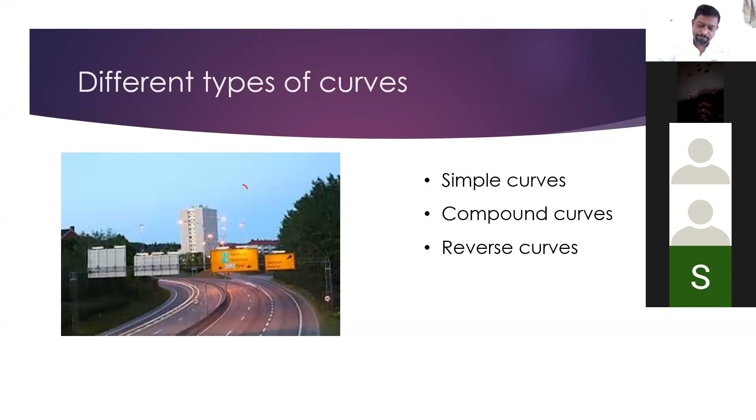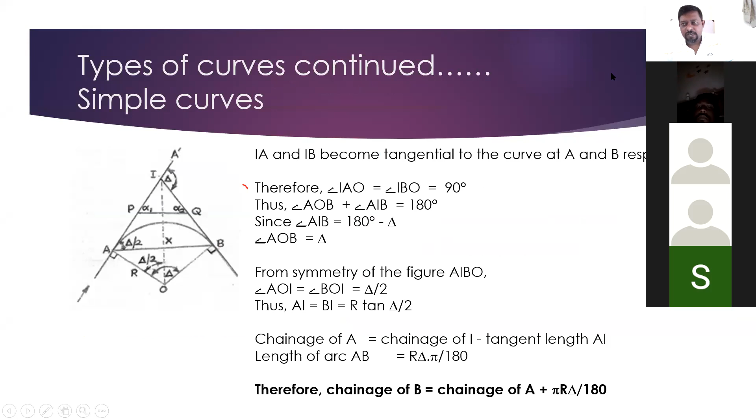Regarding simple curves, they are circular curves which are connecting two directions or two tangents together. Now, if you see this tangent and this tangent, they are connected using a circular curve. There are properties of tangents, and all those properties are inherited by these curves.

For example, if you want to calculate the length of this AI, where I is the intersectional point, it normally comes up as R tan(delta/2). This angle delta is the angle induced at the center of the curve by this arc. So if you want to calculate the length of this AB, measuring this angle in radians, with your maths knowledge you know it is R theta. This represents the angle induced at the center, so if you multiply this by the angle in radians, you will get the arc length.

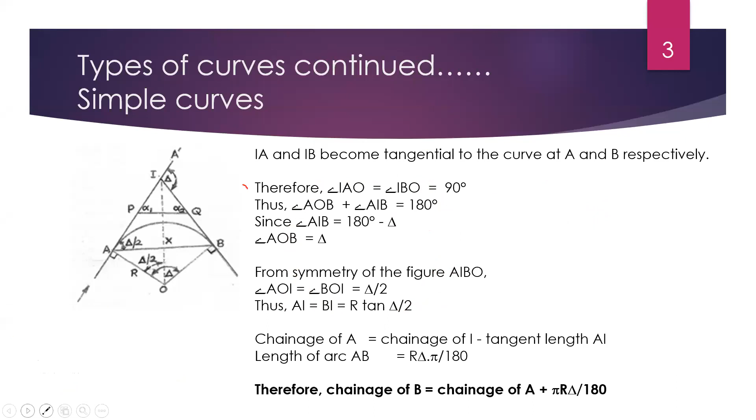Here we are describing compound curves. In compound curves, there are more than one or two curves combined together in order to create a transitional curve or a direction changing curve.

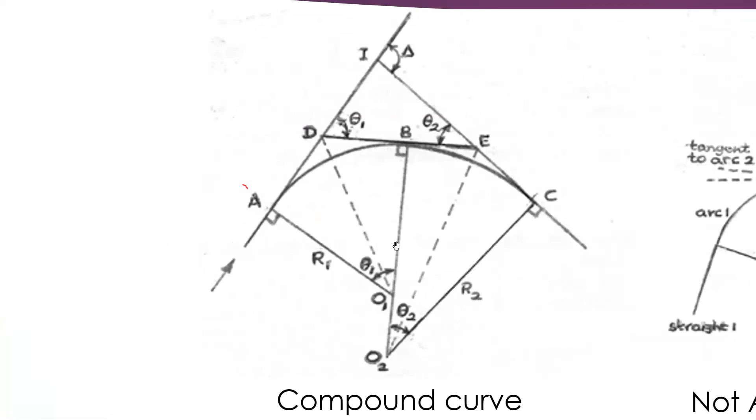Here you can see that there is a radius R1 and there is another radius called R2. These are arcs of two different circles combined together at point B, as you can see here.

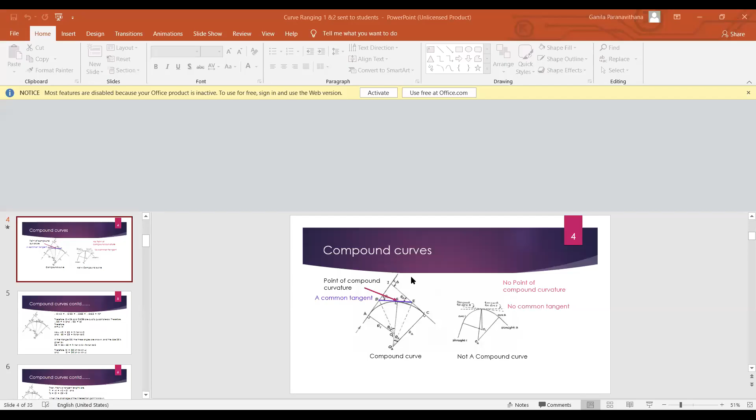Sorry, there is a problem running animations in this, so I am trying to figure out how I can fix it.

Now, in this slide, you can see this point is called the point of compound curvature. This point is the common point, and there is a common tangent which can be drawn to this point for both curves.

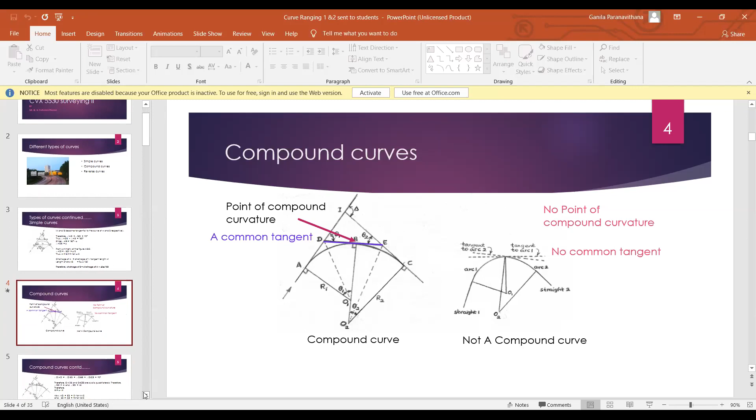Now the next slide discusses the geometry of these compound curves. You can see that this arc AB can be written as an equation of R1 and theta, and this arc BC also can be written as an equation of R2.

So finally, you need to find the chainage of point C with respect to point A. In order to find the chainage of point C with respect to point A, first you need to find the chainage of point A. In order to find the chainage of A, first you need to find this particular point of intersection. Now from this point of intersection, if you deduct IA, you will get the chainage at point A.

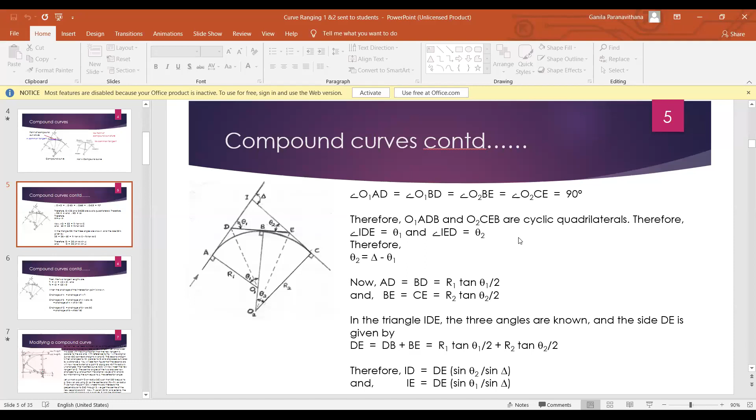If you look at this triangle ADO1, AD can be obtained by R1 tan(theta1/2). Why? These two angles here are similar angles, so this length AD can be calculated using R1 into tan(theta1/2), because this angle here and this angle here are similar. So AD can be found using R1 tan theta1 divided by 2.

Similarly, DB also can be found, because DB is equal to AD according to the geometry. Then on the other triangle, you can find BE and CE as R2 tan(theta2/2). Now, if you know this DE length, which equals DB plus BE, you can see it here.

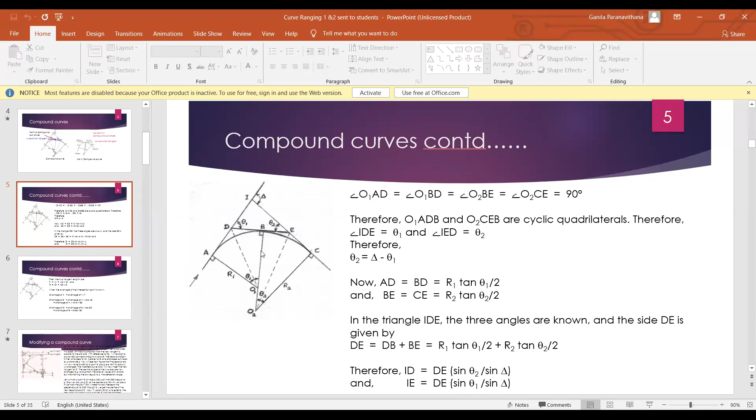Now you know AD and ID, so you can simply find AI here. If you found AI, you can extend your incoming chainage to point I and find the chainage at intersection, chainage at I. You can reduce it by the IA length and you will find chainage A. Now you can find the arc lengths AB and BC, add them up, and you will end up with the chainage at point C.

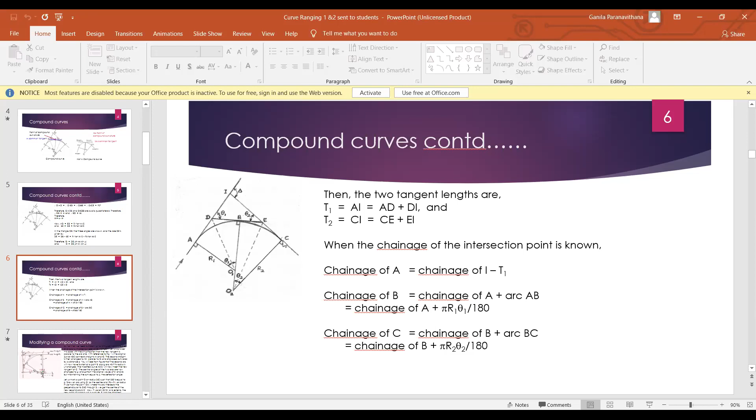Now, this section I have extracted from your book. Now, this section is a little complicated.

I wonder whether I will be able to run the animation through Zoom. There is a problem of running animation through Zoom. I'll give you 1 or 2 minutes to read this. Can you please read this for 1 or 2 minutes?

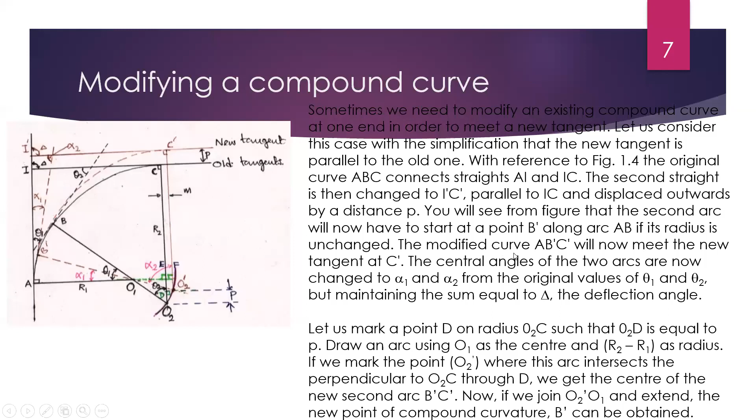I wonder whether the animations will run here. Now you can see for this new tangent to be connected with the compound curve, to this new AB dash. This is the reduced section of AB arc length for this new compound curve.

To obtain that, you need to find this new center of curvature and also the new radius. Now to do that, first you need to mark this point D here.

To mark this point D, first you make a shift of magnitude P, which is equal to the magnitude of P here. This is the old tangent and this is the new tangent. Now you make a length of P and mark D here.

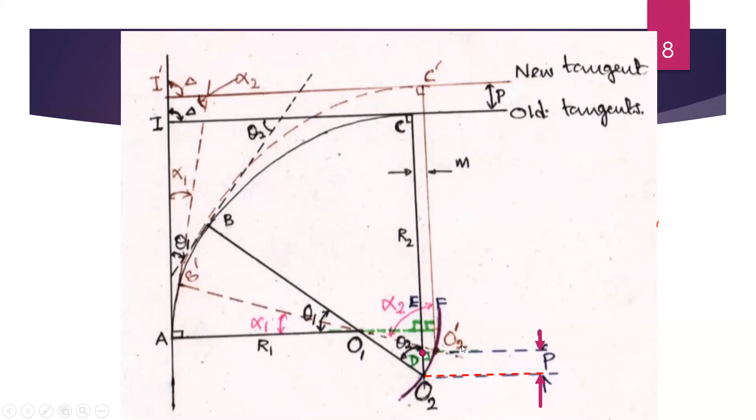Now you know the intersection point between these two radii which were already there, which is called O1. Then you take a radius of R2 minus R1 and you make a small arc here, taking this O1 as the center.

Then after that, you can draw a perpendicular from this point D, which is already marked with a length of P, and you will end up with this new point O2 dash.

And from there, you can get this new radius, and you can take this O2 dash as the center for this new modified curve coming from B dash to C dash, and you can simply construct this curve. So this is the new curve, and this is the new center of curvature for this new curve segment for the compound curve.

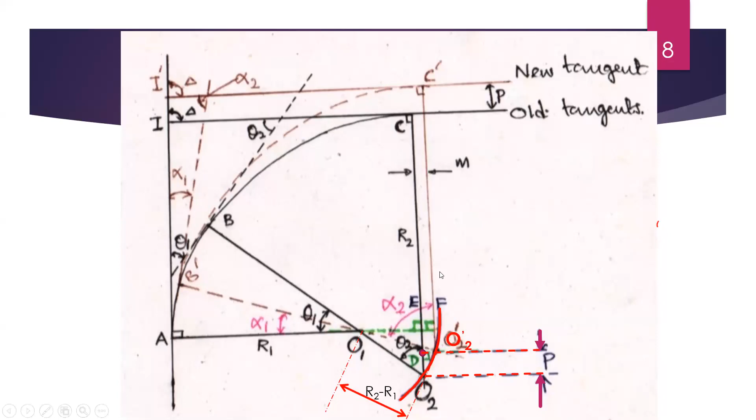Now you can find the lengths of this new curve from the theories that we have explained in the previous slide.

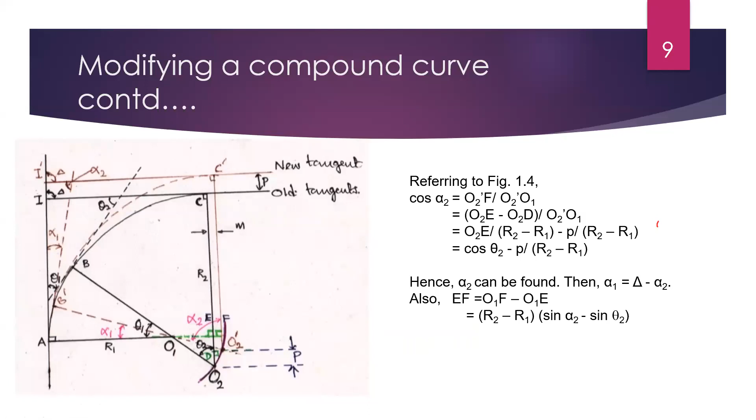Can you read what is there for 1 minute? I have extracted this from your course material.

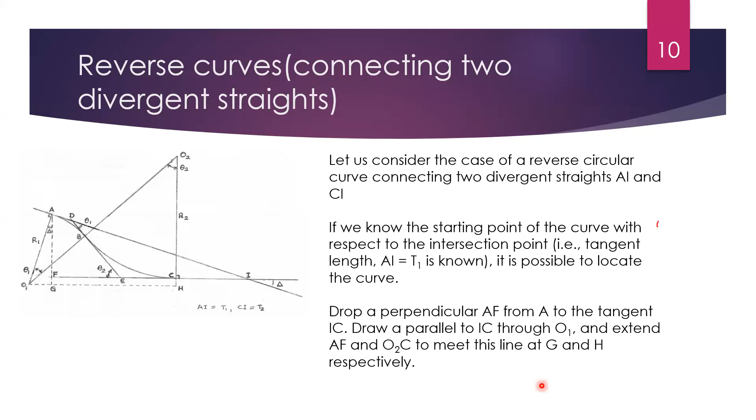I think you have read it. The construction is to drop a perpendicular from A to CI, and draw a parallel to CI through O1, which is the center of curvature for the AB curve.

And there is an intersection point called G, and drop a perpendicular from the center of curvature for BC, O2, to IC and extend it up to H.

Now you need to find the chainage of A here, but first you can find the chainage of I, because this is an incoming road and you know the chainage of that. You can extend it up to the intersection point here and find the chainage at point I. Then after that you have to reduce this length, which is equal to T1. AI equals T1 here. Now, if you reduce T1 from chainage I, you will end up getting the chainage at point A.

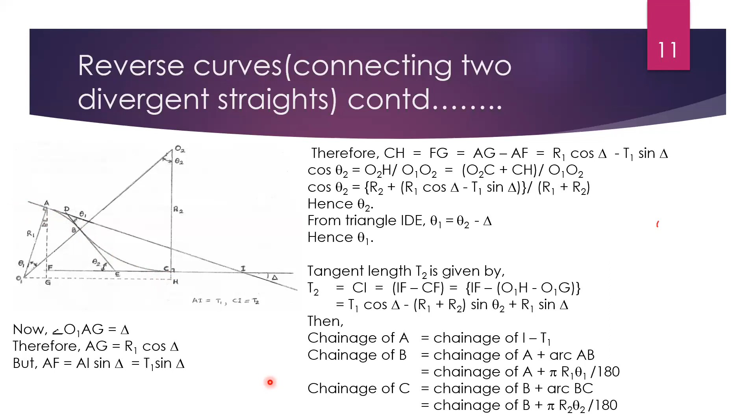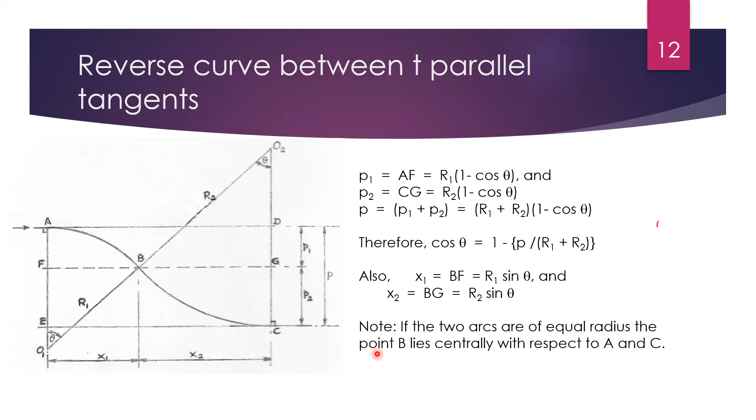I believe you are familiar with chain and theodolite, and how they are used in surveying. I believe you have done Surveying 1 at level 4, and in that exercise you have done your coursework as well.

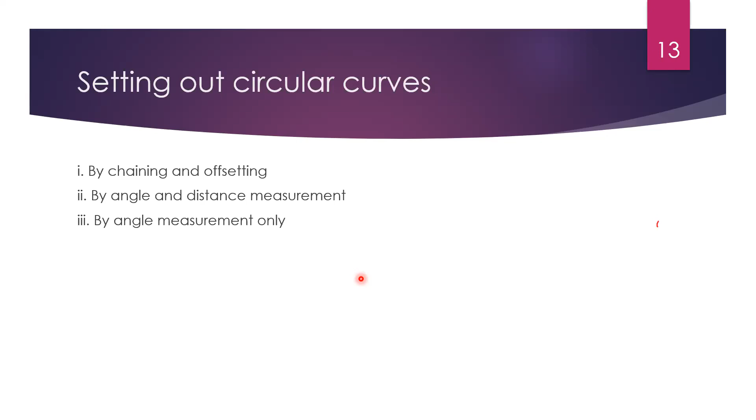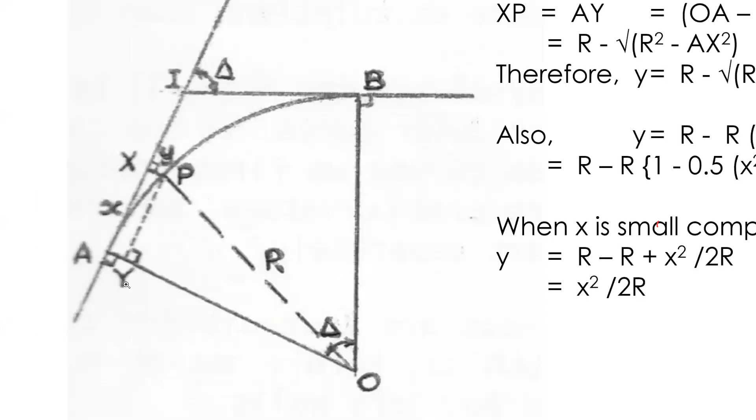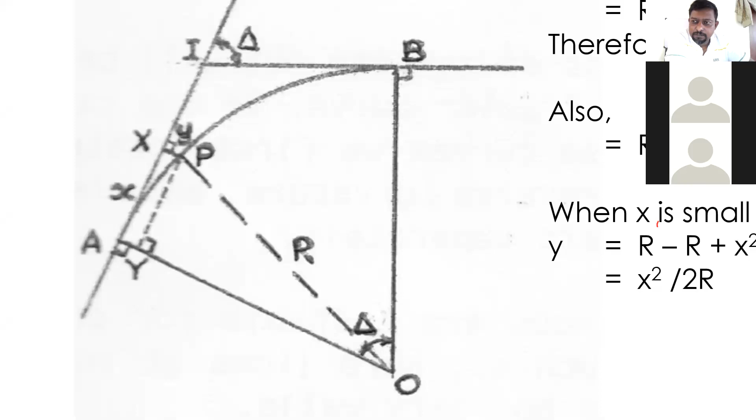Now, if you look at this figure here, towards your left side, we are measuring a distance along AI. Once you find A, we can measure distance along AI with a variable X. If you measure a certain distance X, you can find a certain point. From there, if you measure the distance Y perpendicular to AI at point X, you can find this point P. In a similar way, you can find all the points along this curve if you can build up a relationship between this X and Y.

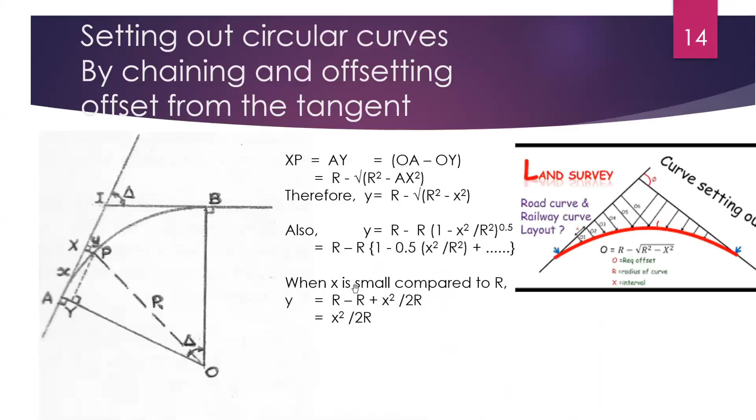Now, to build this relationship between X and Y, you can see a set of geometric equations being used. XP here equals AY here. If you can find AY, you can find XP. So AY here is equal to AO.

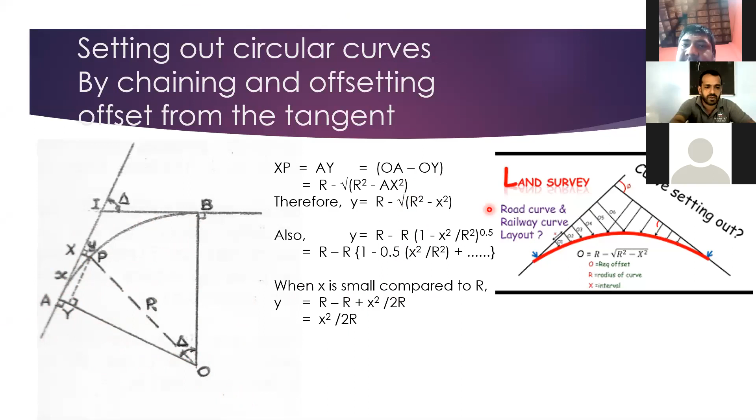Now, if you can find this length AY - AO is equal to R, right? Because this is the radius of this arc. Now OY equals the square root of R squared minus X squared. Why? It is the application of Pythagoras theorem, right? Now this is X, this is R, and you can find OY here. If you deduct this length from R, you can find AY. AY is equal to simple Y here.

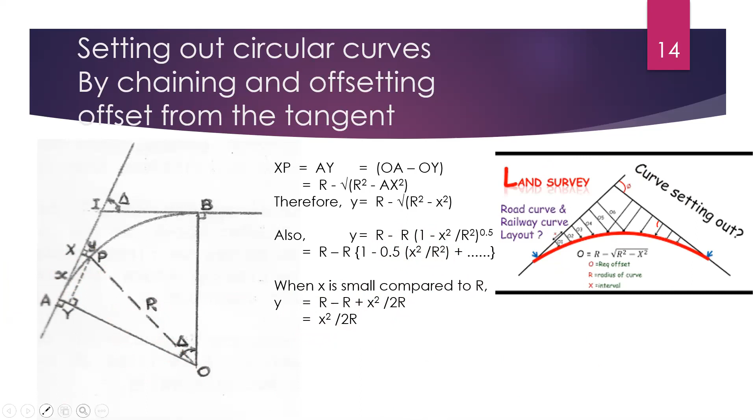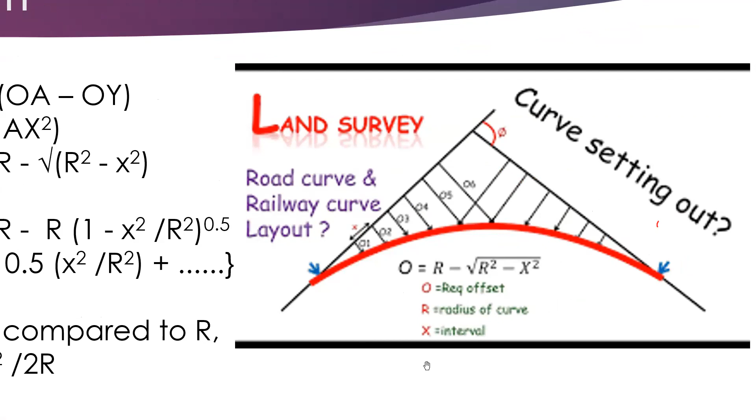If you apply binomial expansion here, we end up with the expansion, but X is small compared to R. Normally these curves have a very large radius, and compared to the radius R, this X is very small. So we can only consider the first component of this expansion, and we can write this equation: Y becomes X squared over 2R. In a similar manner, you can establish all the points along the curve with that equation, right?

Now there is another method to establish this curve using only the chain. It is called offsets from the long chord.

Now this AB straight line here is called the long chord, and if you can find the center of this length AB, we can measure x distance from this point D towards A or B, and mark point X here, capital X, and from there you can draw a perpendicular line of Y to P.

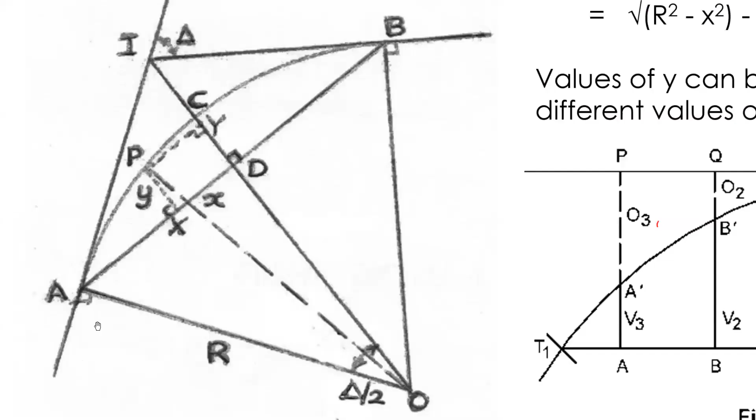As you can see here, if you can find a correlation between this X and Y, you can simply establish this curve along the long chord.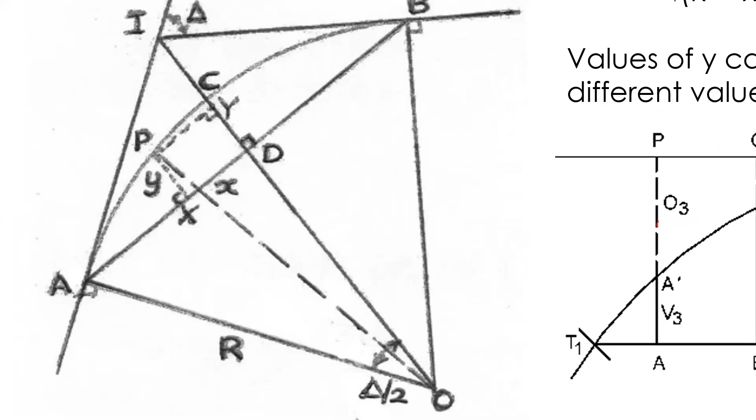Now here you can see capital Y equals XP equals OY minus OD, right? Now OY can be found using Pythagoras theorem, OP squared minus PY squared. Now OP is equals to R, it is the radius of the curve, and PY is equals to X. So it is square root of R squared minus X squared.

And now this OD here can be found using this AOD triangle. Now, if you look at this triangle, you can see AO is R, and this angle AOD equals delta divided by 2, because these two triangles are similar, right? And if this is delta, this is the subtended angle in the center, and half of that will be equal to AOD. Now R cos delta by 2 will give you OD, this length.

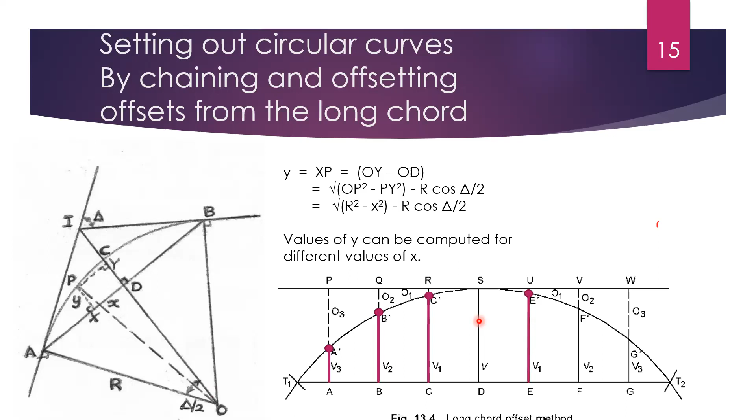So with that you can establish the equation for Y and X. Now you can mark the points as shown by this animation, and you can get the curve using chain.

Now, next method is the setting out of circular curves by angle and distance measurements. In this method, we measure angles from the tangent, and we can measure an approximate distance. This is not a perfect method of establishing curves, but it's an approximate method because if you can see, the arc lengths are quite similar to this chord length because the curvature is very small and the radius is very large.

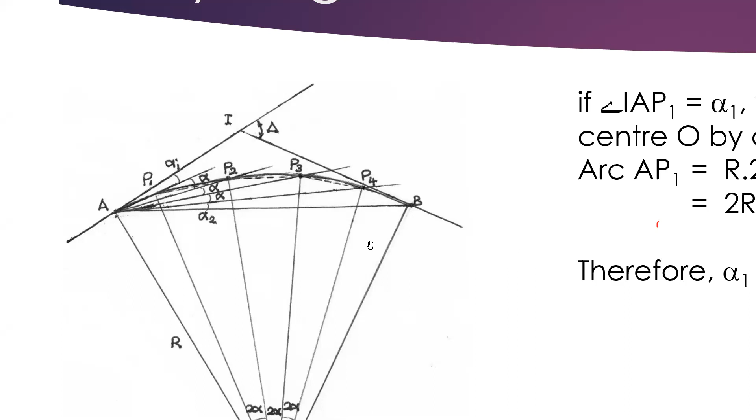So as a result, you can see here the arc lengths are quite similar to chord lengths. And in all these segments, arc lengths are quite closer to chord lengths. So what we do, we measure angle from AI and we measure this distance of this chord length along that line.

Now this chord length, if you look at AP here, AP can be obtained using this equation. But actually these equations give you the arc length, but you can consider it as a chord length and you can mark it along this angle, right? But this is not a perfect method. There are better methods than this available.

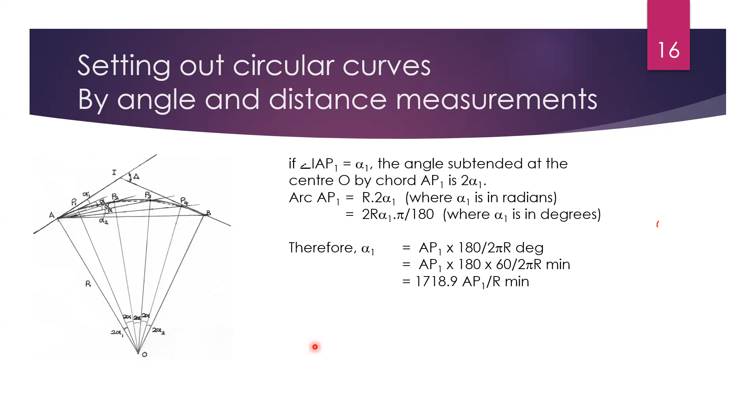Now this animation will show how we do this, and you can measure an angle from the tangent which is equals to half of the subtended angle. Now this is 6 alpha and this is 3 alpha. And you can measure this length, now this length is equals to the length which is found from that equation. So if you know this angle, if you can mark the length along this, you can mark this point P3.

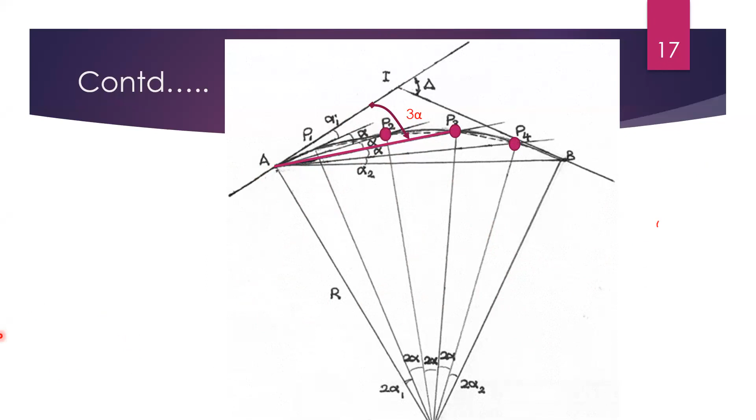Now the next method is to set up this curve using angle measurements only. Now, to do this, you need two theodolites. You will have to establish a theodolite at point A, and also establish a theodolite at point B. And you will have to measure angles from both the tangents and establish this angle here.

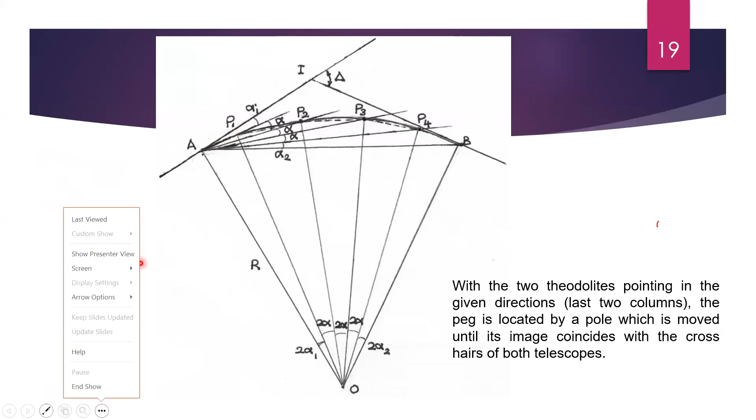Now you can measure one angle from AI, and you can measure another angle from B, and you can establish this point P. Now the matter is that...

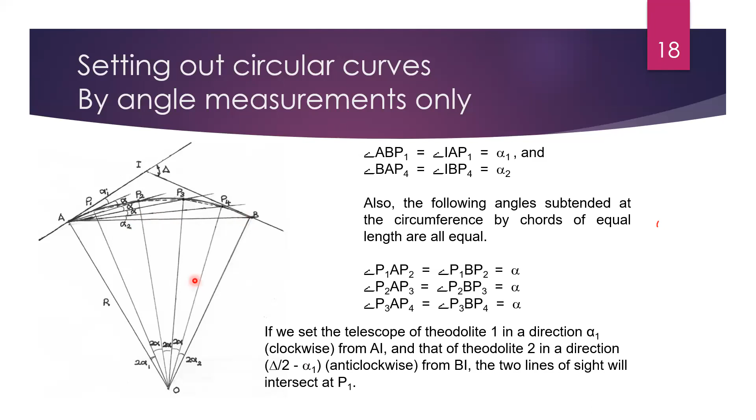This angle that you measure from BI is equals to delta by 2 minus alpha 1. So if you measure alpha 1 from here, the angle between this P1, BI, this angle will be delta by 2 minus alpha 1. And this is how we do it: you measure alpha 1 from AI, and you measure delta by 2 minus alpha 1 from IB, and you can mark this point P1. Similarly, you can mark all the points.

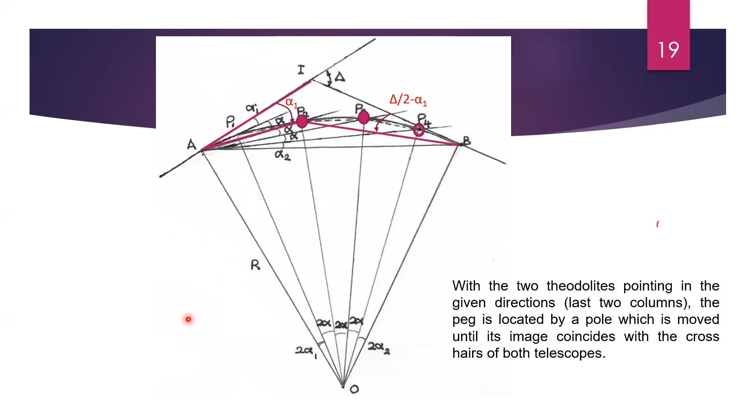Now, let us briefly discuss possible problems in setting out intersection points when the intersection point is inaccessible. So far, in all the cases we've discussed, the intersection point was available. Why is this intersection point important?

It is important because you want to establish point A at the beginning, and from there onwards you start establishing the curve. But in case you can't access this point I, how are you going to establish point A? This example shows how we can establish point A if you can't access point I.

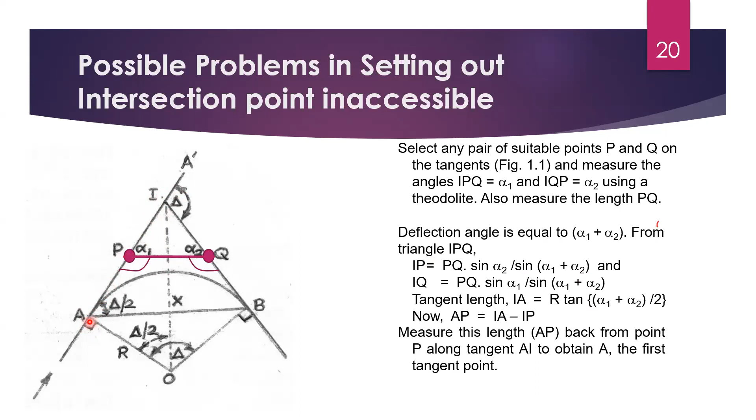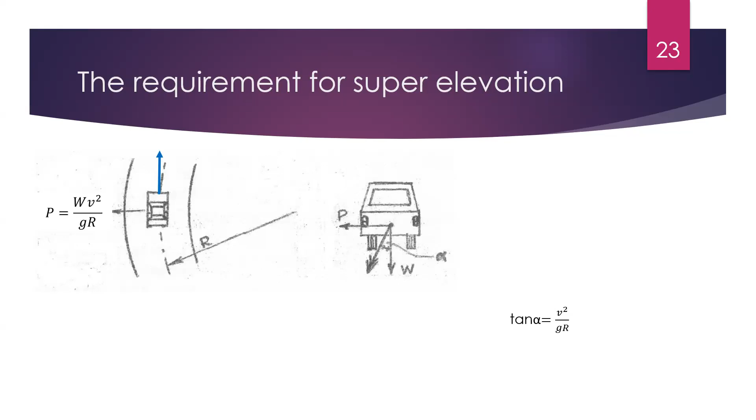The requirement for super elevation: you've seen when traveling on roads, when a vehicle drives along a curve, there is an angle of the road surface. This angle is called super elevation. It is purposefully created to make the drive smooth and comfortable, and for certain vehicles it is a must to have super elevation in order to go through a transitional curve or a bend.

In this diagram, a vehicle is traveling on a curve, and due to centrifugal force, there is a force created which tends to move the vehicle away from the center of curvature, equal to WV squared over GR. We have studied these things before.

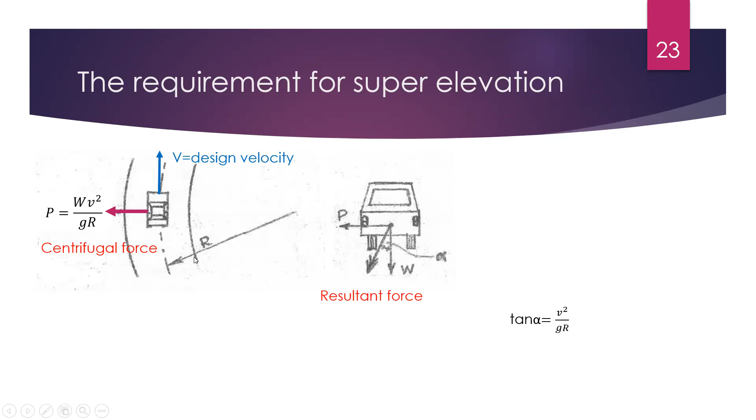This is the centrifugal force, and there is a resultant force created by the centrifugal force and the weight in this direction. If we tilt the road surface as shown with an angle alpha, it will induce a counter force for the centrifugal force equal to W sine alpha, as shown here. And tan alpha will equal V squared over GR. So for the vehicle to travel on the path, this P cos alpha has to equal W sine alpha.

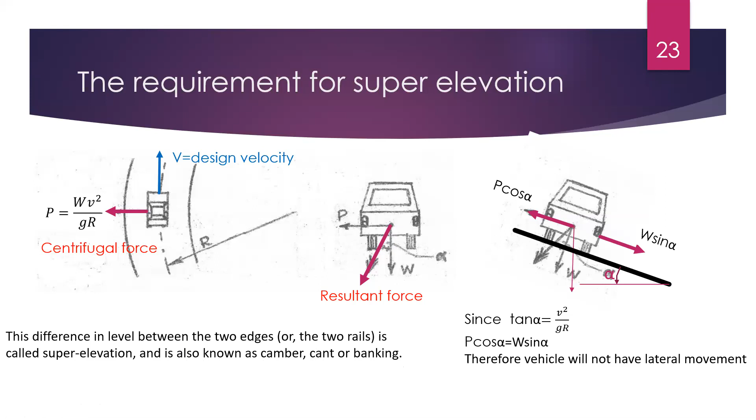This difference between the two edges of the road, the edge on the right hand side and the edge on the left hand side, is called super elevation, also known as camber, cant, or banking. Sometimes we use the word camber in highway engineering, but the technical term is super elevation.

Now for you to understand the transition of super elevation, consider this as the road surface. In the curve, the road surface has to be tilted at a certain angle. But you cannot tilt it to this angle all of a sudden, so there has to be a gradual transition.

To do that, there is a section called the transitional section on a road. In this diagram, you can see three segments: tangent, transition curve, and circular curve. In the circular curve, you need to achieve the super elevation, but in the transitional curve, you need to transit, so the super elevation has to change. In this lesson, we are going to talk about this aspect.

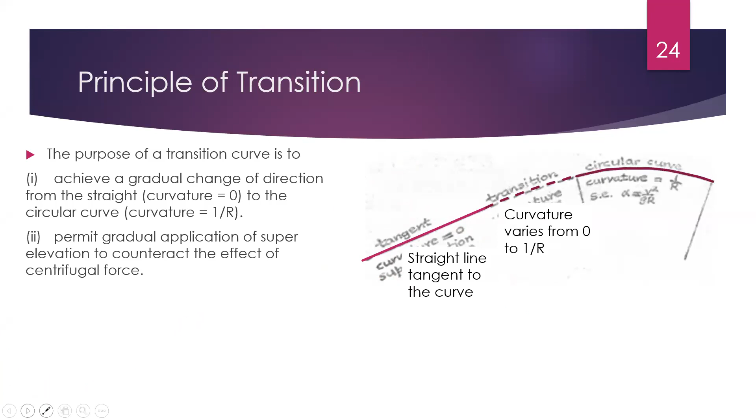Now this is the tangent line, a straight line tangent to the curve. And this is the transitional curve, where the curvature varies from 0 to 1/R. And this is the full circular curve.

Now this is what is happening. You can see here the tangent - in the tangent, the road surface is like this. And in the circular curve, the road surface has become tilted. In order to achieve this transition, this transitional curve is used.

I'll give half a minute to read this for you.

In this transitional curve, 1 upon r, which is the curvature, is proportional to the length of the curve. So we can write it mathematically as r into L equals a constant k. If the length of the transition is capital L and the radius of curvature of the circular curve is r, then when simple r becomes capital R, simple L becomes capital L.

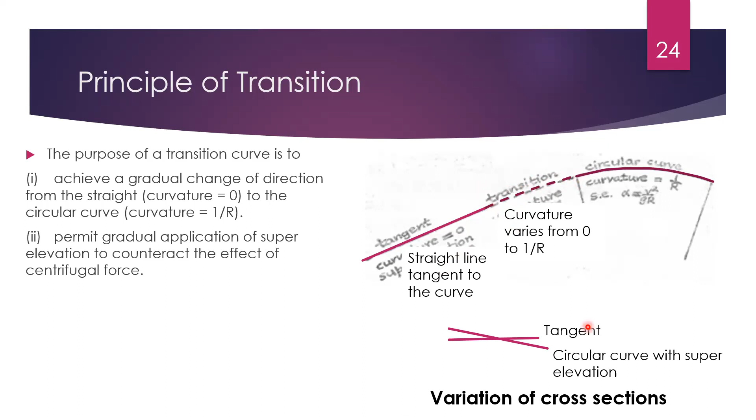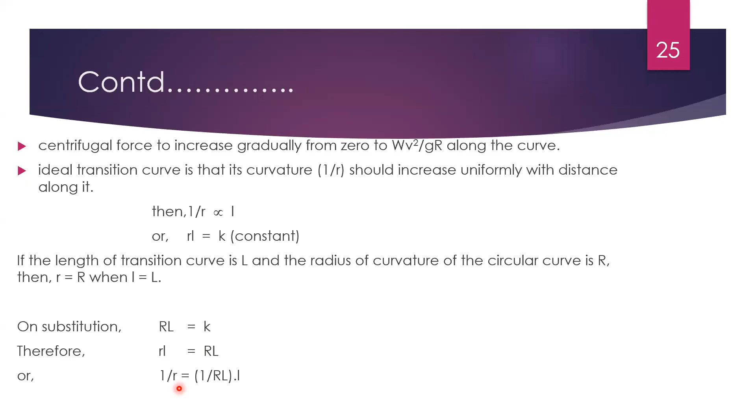If you apply capital R for simple r and capital L for simple L, where capital L is the full length of the transition, capital K becomes RL. Therefore, if you substitute the K value obtained from known values, RL will be equal to capital R into capital L, or 1 upon simple r equals a constant into L.

Let us consider an infinitely small element dl of the transition, with radius r and making an angle phi with the straight line. If the angle subtended by this element at its center of curvature is d phi,

then d phi divided by dl equals 1 upon r, which is the curvature, L divided by capital RL. We can simplify this variable separation in this differential equation: d phi equals 1 upon RL into simple L into dL.

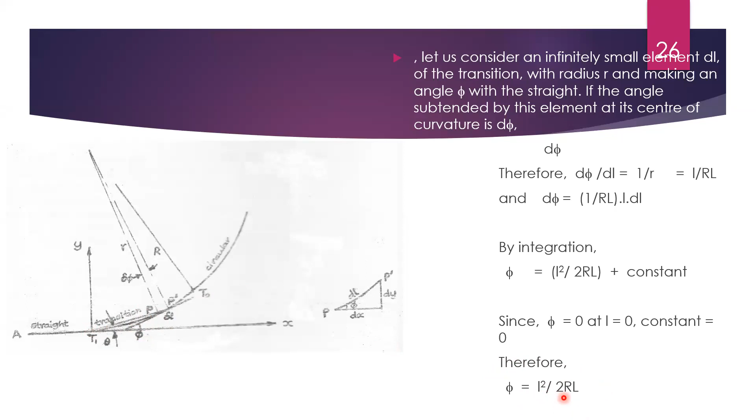The value of the minimum safe radius R is quite significant, because if R becomes smaller, the curves become sharper. Have you traveled on hill country roads? There are very sharp bends, especially in Nuwara Eliya. If you have very sharp bends, to take these bends you need to have reduced speeds. So if you want a smooth transportation system, this radius has to be larger, but for a certain design speed, you need to decide what is the safest radius. In order to decide that, a minimum safe radius has to be defined.

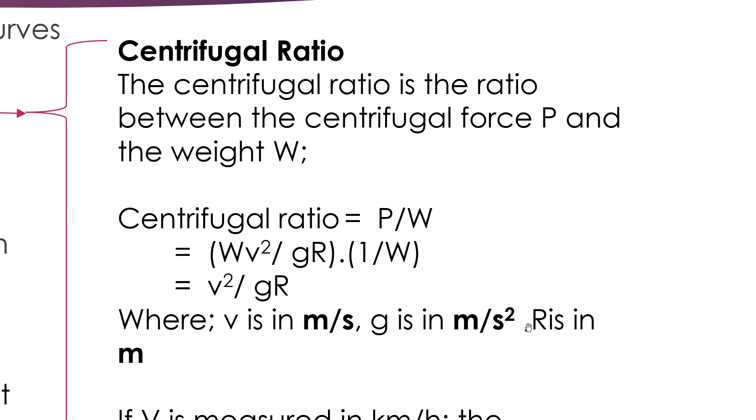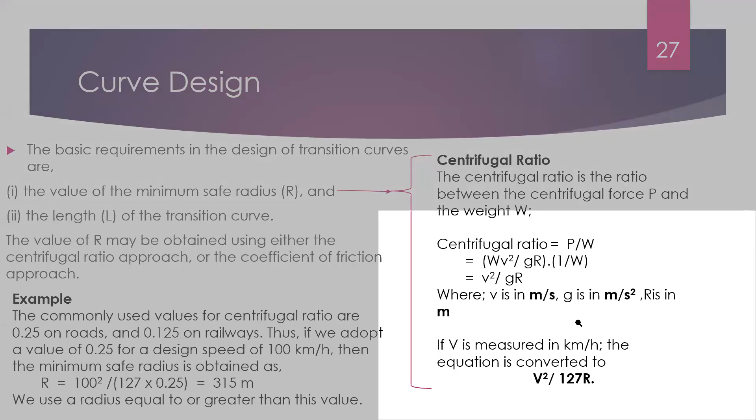If V is measured in kilometers per hour, the equation has to be corrected for dimensions, because all these parameters have to be in similar dimensions. By applying the gravitational acceleration values, they have simplified the centrifugal ratio to V squared over 127R.

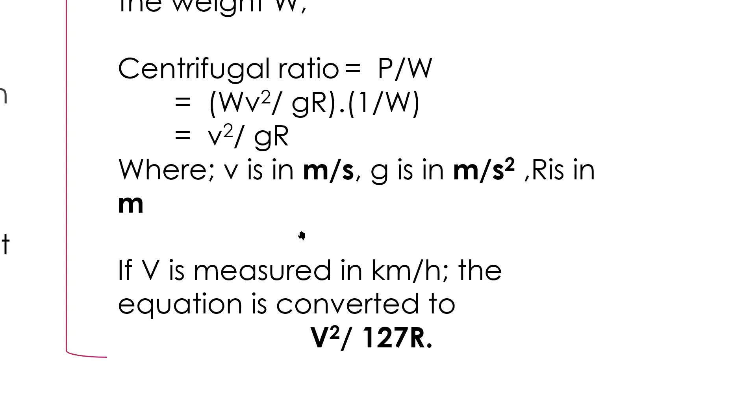Now the lesson continues. If you look at the forces acting on the vehicle, there is a centrifugal force W V squared over GR. There is a component of that acting as P cos theta along the surface of the road, but away from the center of curvature. There are also two components of W acting along the surface and perpendicular to the surface. There is a normal reaction coming from the tires of the road to the vehicle to bear the weight, which is capital N. The lateral friction force F between tires and road surface also exists, because otherwise the vehicle would slide down along this tilted surface.

So if we look at the force equilibrium of this vehicle: capital F equals P cos theta minus W sine theta. If you substitute the value for P, which is capital W V squared over GR, this equation comes. Then if you think about the force equilibrium perpendicular to the surface of the road, capital N will become P sine theta plus W cos theta.

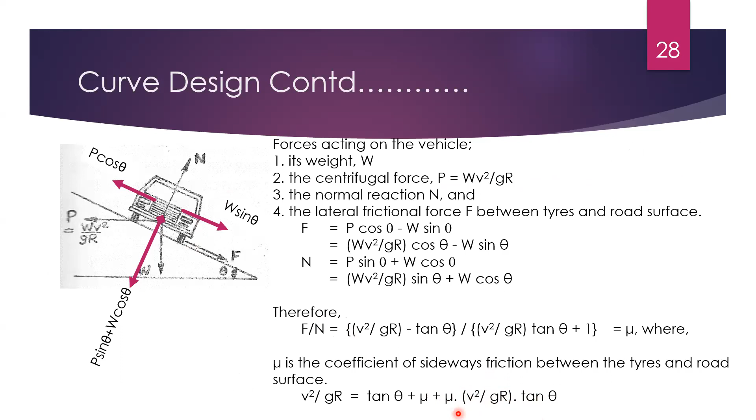We are talking about this term here - it is insignificant because these figures are small. So if you multiply mu and tan theta together, they are insignificant. Therefore, this equation becomes V squared over GR equals tan theta plus mu.

If the speed is given in kilometers per hour, the previous equation, which was derived for kilometers per hour, will appear and the equation will become this. This shows that the effect of centrifugal force is counteracted jointly by super elevation provided by tan theta and the sideways friction developed.

So now there are two forces which will counter the centrifugal force: the force created by super elevation, and the sideways friction. The TRRL quotes values for mu as 0.18 up to speeds of 50 kilometers, and 0.15 at higher speeds.

Now when we design roads, there is a particular thing called design speed. I think you have learned these things in highway engineering from Professor Veerasekara. When you have high design speeds, the entire geometry of the road design changes accordingly. For example, if the design speed is 100 kilometers per hour and the super elevation is limited to 1 in 14.5, then mu is equal to 0.15. Hence you can apply those values here in this equation: design speed, super elevation, coefficient of friction. Then you can calculate the minimum allowed radius, that is 360 meters.

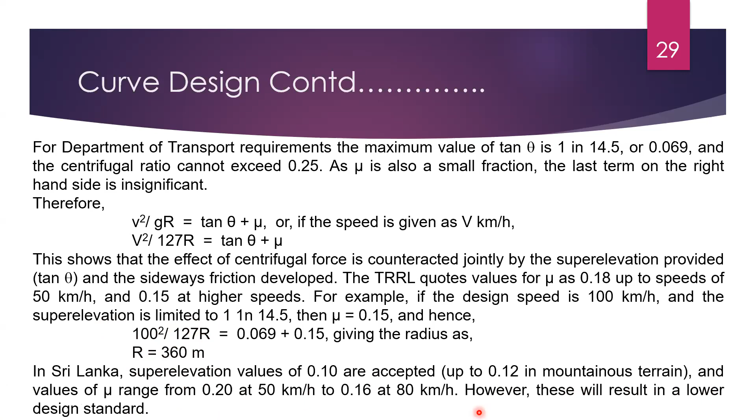Now the next factor you need to consider in designing transitional curves is the length of the curve. There are two methods explained in your course materials to decide the length of the transitional curve: the first is the rate of application of super elevation, and the second is the rate of change of radial acceleration.

As I clearly said, we need to change the super elevation to the maximum super elevation, so you have to do it gradually. But for a unit length, the rate at which you change the super elevation will decide the length of the transition, and also the rate of change in radial acceleration.

First we'll talk about the rate of application of super elevation. Now this is from the book. Can you read it for half a minute?